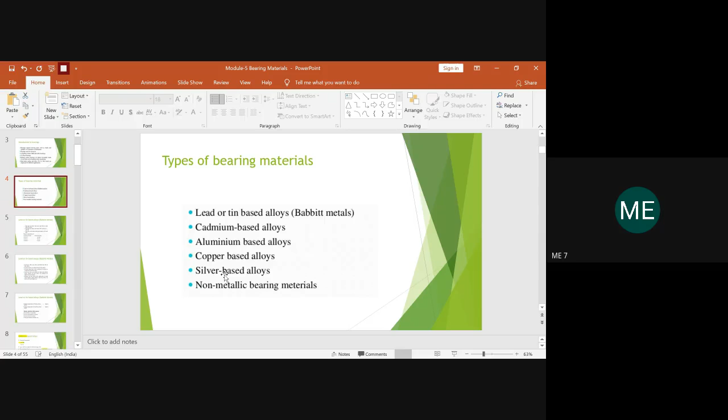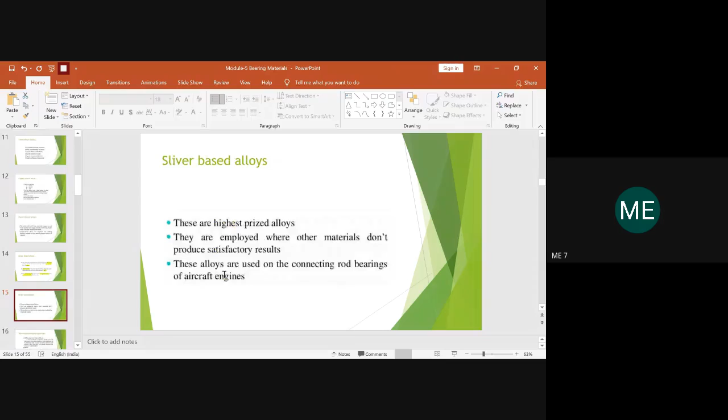If you remember in the previous class, we were discussing the different types of available bearing materials, like cadmium based alloys, aluminium based alloys, copper based, silver based, and also the non-metallic bearing materials which are feasible for making new bearing designs. We dealt with all these types of materials and their properties, how good each is for which type of lubricant, for which type of bearings. Coming to non-metallic, we spoke about Teflon and nylon, wherein Teflon had comparatively better results as a bearing material in comparison to nylon.

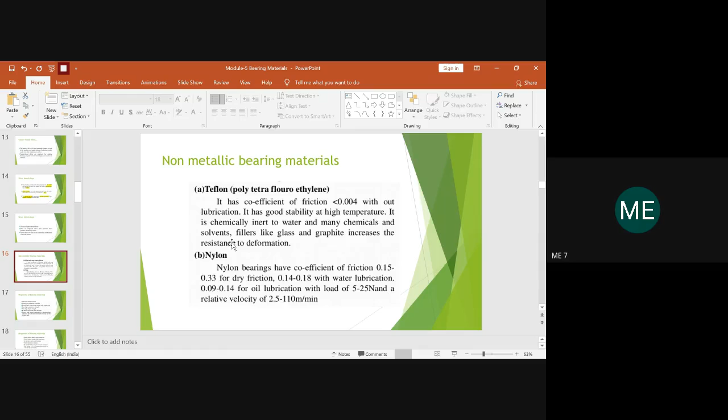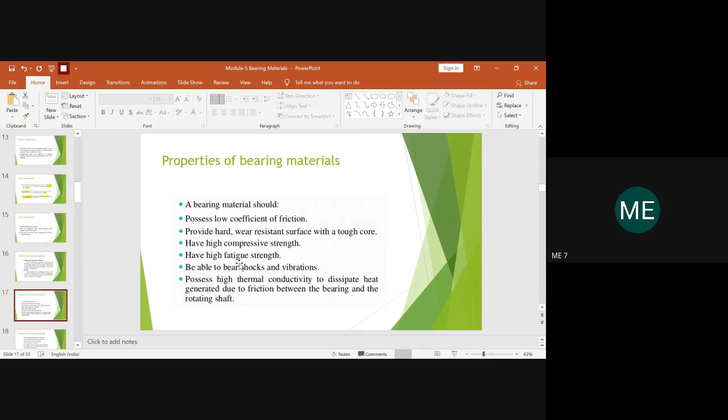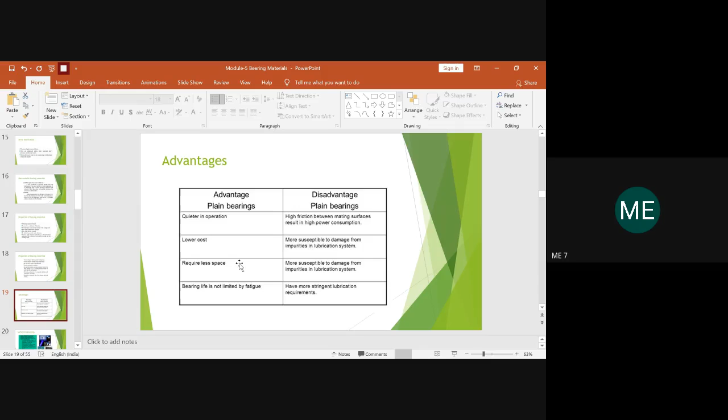We also dealt with the basic properties which have to be in any bearing material. These guidelines will help you in selecting the bearing material, regarding the general requirement and minimum physical properties that have to be there. We also spoke about how to figure out the advantages and disadvantages of any bearing material, focusing on plain bearings, which you can try to enhance further as part of your assignment after completion of this module.

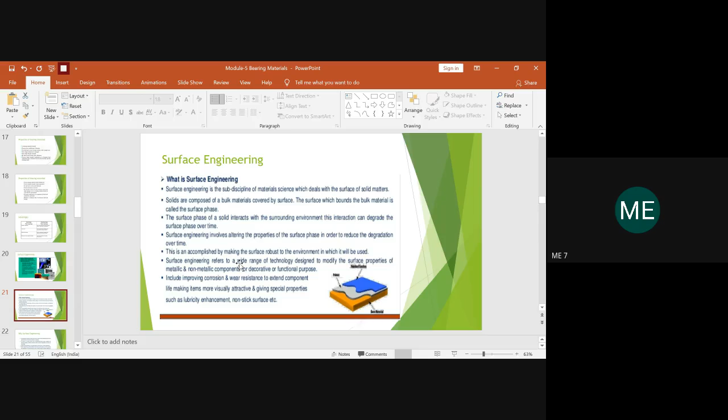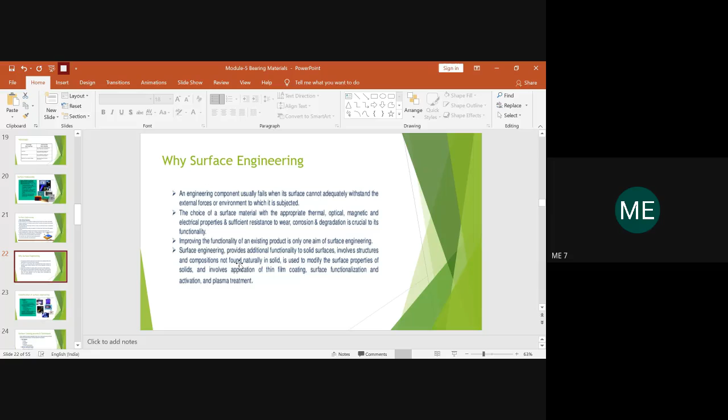Then we spoke about what surface engineering actually is, and its importance. With the help of surface engineering, how we can protect against wear and tear which comes into picture when you have any bearing device or other moving or rolling component coming into contact due to relative motion. We also studied why surface engineering is needed, what were the previous techniques, and what are the advanced versions of surface engineering schemes coming into picture now.

I had told you the basic classification of surface coating processes. These coating techniques came very recently, but in traditional practice also people safeguarded the surface of any device from the external surroundings so it could be protected from corrosion and other circumstances. They used to do it in a traditional way, and now as technology has advanced, we have advanced ways of protecting the surface of any device. So these things now you have to study in depth.

As I told you in the previous class, under traditional techniques we have very few, which are painting, electroplating, galvanizing, and also thermal and plasma spraying. These are the techniques which come under traditional categories. Apart from that, we have the advanced coating technologies which we have to go into in depth, one by one.

The first one is related to painting. As the name itself suggests, for any product, if you apply a layer of paint, it will help safeguard the body across the surface for a long period of time. It depends upon which type of painting you're using. This is a normal thing everyone knows, to protect the surface of the media, whether it's a wall or any other surface of a product that you have to safeguard from the external surrounding, depending on the quality of the paint you use.

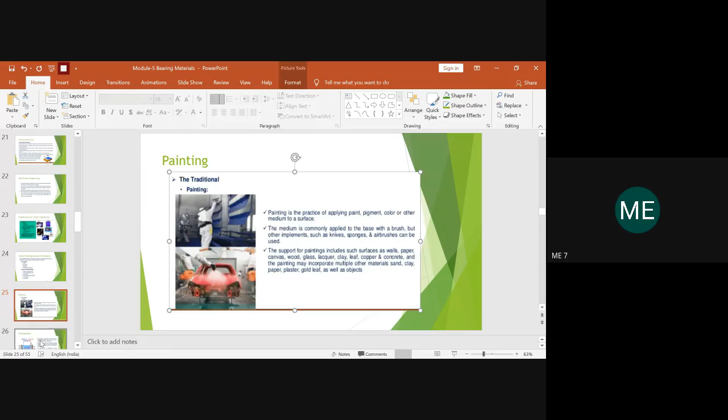So the second technique under the traditional one is electroplating. As the name itself suggests, electroplating is a process wherein it uses the electrical current. When you use an electrical current, it helps to dissolve some cations, mainly the metal cations. When these metal cations are dissolved, the dissolved metal cations result in the formation of a coating across the electrode. So this is electroplating.

You will have a container in which you will have the silver nitrate solution, with an anode and a cathode. When you subject the silver nitrate solution to an electrical current, the cations in the solution get dissolved and get plated on the electrode, so that it helps in protecting the electrode from the external environment. Here the anode you are using is pure silver.

This is just an example to explain how a surface could be coated by means of different techniques. The first one we studied was painting, and this is electroplating. So you should think when to use electroplating. It is mainly used to change the properties of the surface. Sometimes you need to protect the surface from the external surroundings. Sometimes the properties across the surface should be different than that of the bulk body.

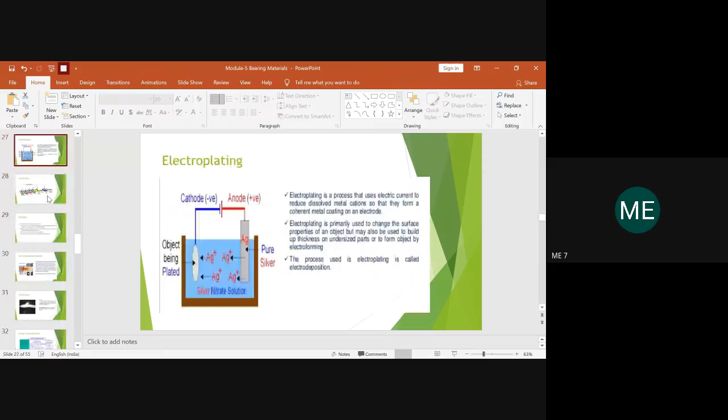So this is what usually happens in a galvanizing process. If you go into the galvanizing process, basically you will have two ways to make this layer of zinc coating.

The first one is it forms a coating of corrosion resistance, so that when you apply a zinc coating on the surface, it provides resistance to all the types of corrosion which can come into picture across the surface of the material. So this happens if the metal you are using is very delicate and gets corroded easily.

So again it depends upon the material you are using. If the metal or material you have selected is very good and won't have any problem related to corrosion, if it is a highly corrosion-resistant material, then there is no need of going for zinc coating, right? It already has high resistance towards corrosion.

Suppose the metal you have used is very delicate and can easily get corroded, then this galvanizing process will help in protecting the surface against corrosion. So this is why galvanizing has to come into picture. And secondly, it can also serve as a sacrificial anode.

So when you apply a zinc coat on steel or iron, it acts as a sacrificial layer. That sacrificial layer will help to safeguard the actual bulk of the body. Anything which happens will happen to the sacrificial layer, which acts as an anode, so that the device below that sacrificial layer will be safeguarded and won't get corroded or rusted easily.

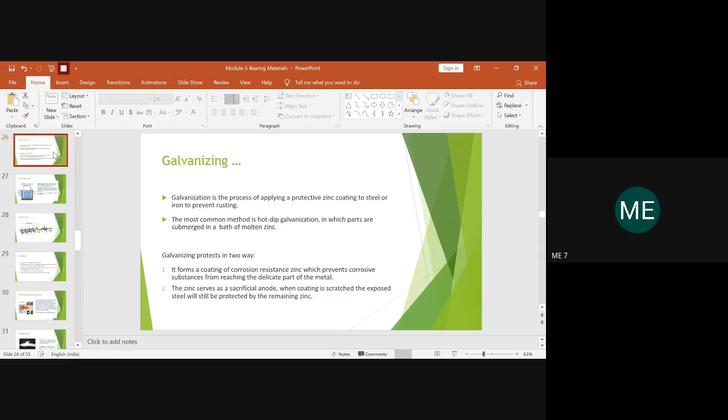So these are the two reasons why galvanizing has to come into picture, the two things you have to remember when you speak about the galvanizing process. First you will clean the surface, then you will rinse it. After rinsing, you have to do a process called pickling. Once the pickling is done, you will re-rinse it.

Once it is rinsed, you will dip it into a solution. Once you dip it into that solution, all the impurities will be removed, so it will be totally contamination free. Then you will allow it to dry. Once it is dried, you have a container which has a zinc solution in it. You will dip it in the zinc bath as per the required dwell time.

Once it has been dipped and soaked for the required time period, it will be allowed for solidification and cooling, so that the coating applied on the steel or iron, which gets easily rusted, will be solidified when it is subjected to cooling. After cooling, you will inspect whether the coating has been applied uniformly throughout the given rod of steel or iron.

If it is done, then the steel or iron rod which has been coated with zinc will have resistance towards rusting, and it will not get corroded easily. So this is the main reason why you have to go for galvanizing. Depending upon the requirement, you should think about which process you will opt for to protect your device from the external environment.

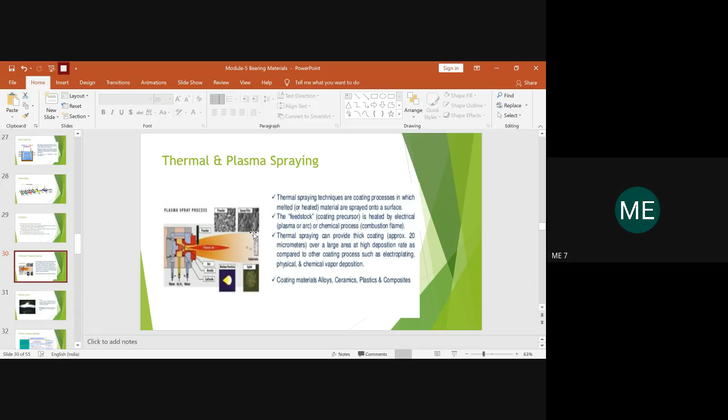When it gets heated to the molten temperature, the material gets accelerated. Why? Because of the chemical process. When the material gets accelerated, it moves from one end to the other. Finally you have a substrate here; it will come and deposit. It can happen with respect to temperature effect, or due to plasma spraying. In both cases, it helps to deposit the coating across the substrate. So this is how a plasma spray technique could be used.

This plasma spray technique is very useful when you're going to make a micro device, micro electromechanical systems. To make any MEMS device, plasma spray deposition will usually be very useful. But it has one disadvantage. What is it? The plasma spray process is very expensive, as the cost is comparatively higher, and the complexity of the process is also a little bit more. Hence, even though it is a very good technique, these two disadvantages make you think about whether to go with plasma spray or not. If suggestions and modifications could be made, then you can think about the plasma spray technique for large area applications. So this is about the plasma spray.

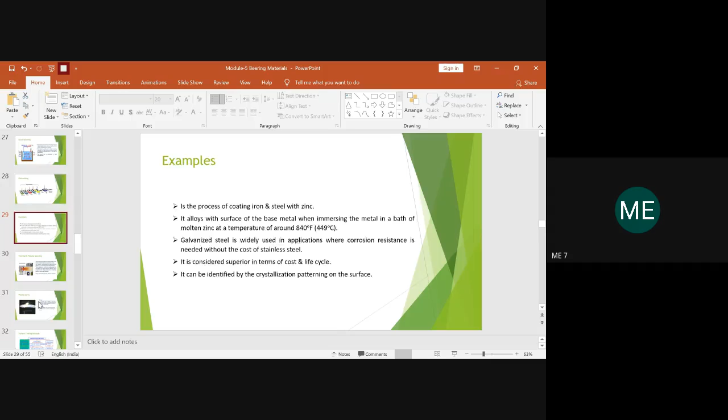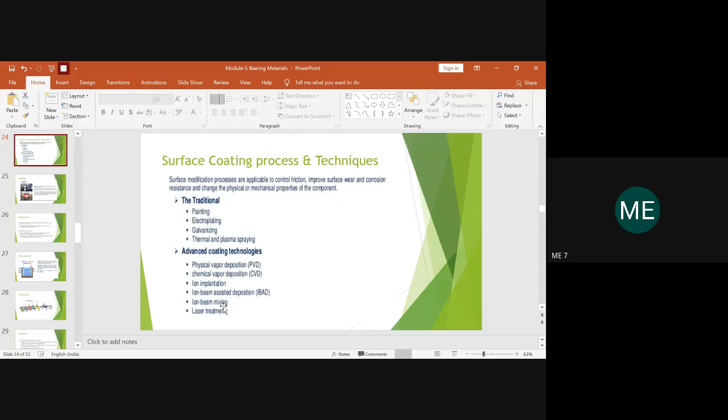So until now we discussed the traditional types of coating. What were the traditional types of coating to protect the surface from the external environment? One was painting, electroplating, galvanizing, and thermal and plasma spraying. So this is the traditional one. Then come the advanced coating technologies we can apply as per the requirement. These are physical vapor deposition, chemical vapor deposition, ion implantation, ion beam assisted deposition, ion beam mixing, and laser treatment. So we have to go through these one by one.

Before that, let me talk about the outline of different surface coating methods. These are the methods followed in any clean room when you want to make a micro or nano device. These are the basic requirements one has to follow for MEMS or nano device fabrication, wherein you use complex types of coatings. These coatings could be categorized into three sections. What are these three sections? Gaseous state, solution state, and semi-molten state.

And hence the name CVD, PVD, and IBAD. So in your syllabus, you have CVD and PVD, which we will be dealing with one by one. So when it comes to solution state type of coating, we have different methods to apply the coating across the surface. So this also we usually go for in thin film. So whenever you have made a thin film and you want to make a coating on it, you have to go by means of solution state.

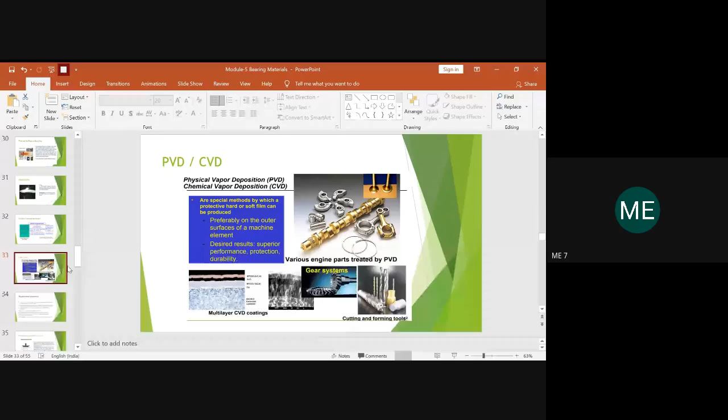So after this, any doubts related to surface coating classification? Are things clear enough? Hello, Mr. Kiran, are you there? Subramanya, kindly give a reply. Yes, ma'am. Are you understanding? Hello? Yes, ma'am. Any doubts, please let me know.

So under surface coating technique, you now have to study physical vapor deposition. So what happens in physical vapor deposition? Here a layer of coating will be deposited on the substrate with the help of vacuum deposition technique. So you should understand what this vacuum deposition method is. Right, the substrate will be kept in a closed vacuum chamber and you will be having the variants of vapor which are coming and falling on the substrate, and it results in the formation of a thin film, right? So this is the main trend which has been followed in physical vapor deposition.

So how you get this layer of vapor deposited on the surface so that you can characterize it by going into the morphology of the material and see whether the layer deposited is uniformly done across the surface, whether the thin film coating is done properly or not. So this you have to cross check.

First you will do the layer of deposition, then you will cross check by seeing the characterization of the layer which has been deposited. Okay, so in case of physical vapor deposition, you have two techniques through which the layer of vapor has been deposited. So what are those two processes? One is the sputtering and the other is evaporation.

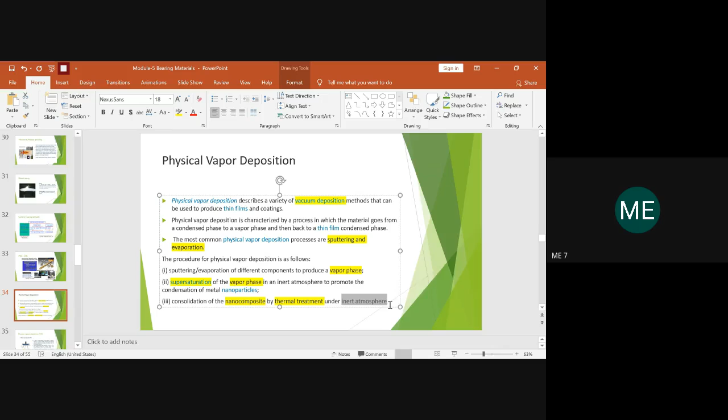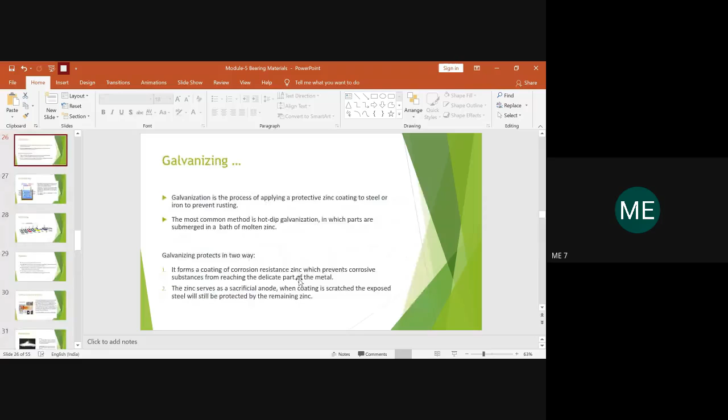In that, this PVD technique plays a really vital role. For regular, traditional coating, what we studied earlier like painting, plasma spray, electroplating, galvanizing will hold good. But now, as devices become thinner and thinner into micro and nano level, this type of PVD coating and CVD coating will play a very vital role.

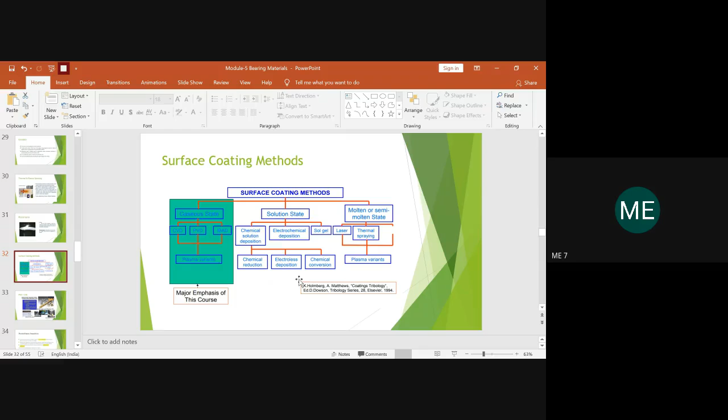When we speak about thin film, it is usually the target and the substrate, and hence in PVD coating it is usually mentioned as the target and the substrate. So you should not get confused about what is the target and what is the substrate material. This is about the PVD technique.

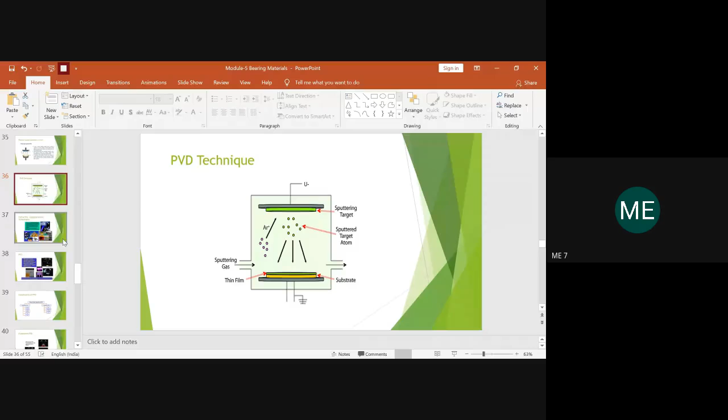One more thing, I told you that the layer could be deposited by means of vapor phase or by sputtering. If it is sputtering, how will it be sputtered? It could be sputtered either by ion beam sputtering or by magnetron sputtering. This helps to sputter the layer of coating from one point to another.

All this also happens again in a controlled, inert atmosphere, wherein it helps to move the atom from one point to another, resulting in the formation of the film. As you have bombardment of the atom from one location to the other, it is moving from one end to the other, resulting in the required coating.

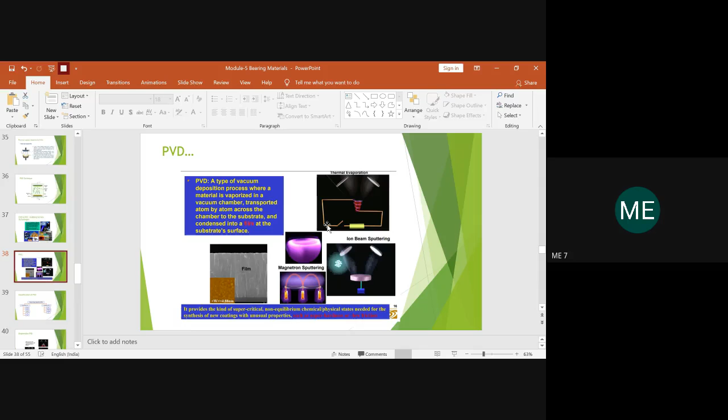This is in glimpse about the PVD techniques which are being used. Once you're thorough with the PVD techniques, you can see that we have different classifications under that. One is the evaporative PVD and the other one is the sputtering PVD.

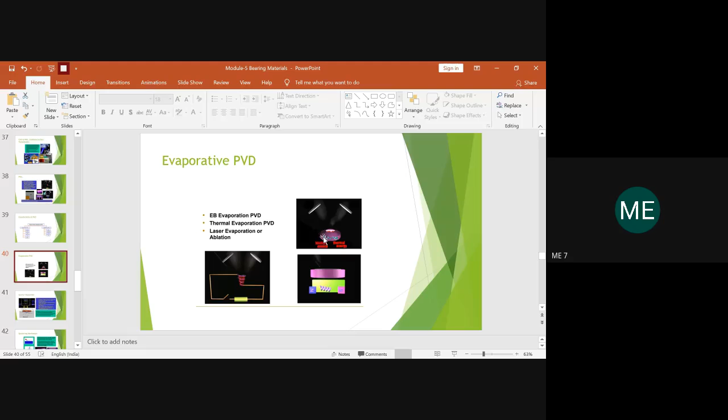Evaporative PVD has three variants, what I'm telling you. One is the EB evaporative PVD, which is a thermal evaporative technique, and this is a laser evaporation technique, what you have in general.

If you go in general to sputtering deposition, you have two types. One is the magnetron type of sputtering. In this sputtering unit, what happens is you will be supplying the voltage to the given container. You'll be having a voltage which you apply across the rarefied gas.

So it will be a vacuum chamber, having an inert atmosphere with the required gas. You subject voltage to the rarefied gas, and a breakdown occurs in the gas which is in the closed chamber.

When these two strike enough, some amount of energy is generated. This energy is transferred to the targeted atoms, and when it transfers to the targeted atoms, a few of it escape and directly come and sputter uniformly on the substrate. When it sputters, it results in the formation of a thin film. So this is about how sputtering comes into picture.

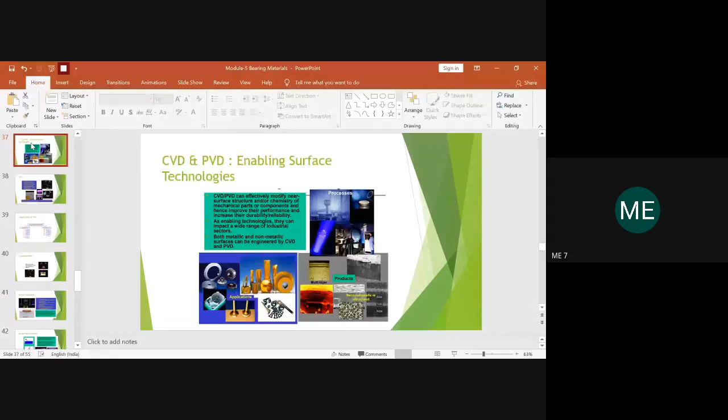In your syllabus you have just PVD - physical vapor deposition technique. If they ask you the PVD technique, you should know how this process comes into picture: one is due to sputtering, and the other is due to evaporation. Both techniques I have explained, and how the supersaturated vapor phase comes and how it gets deposited, you should explain.

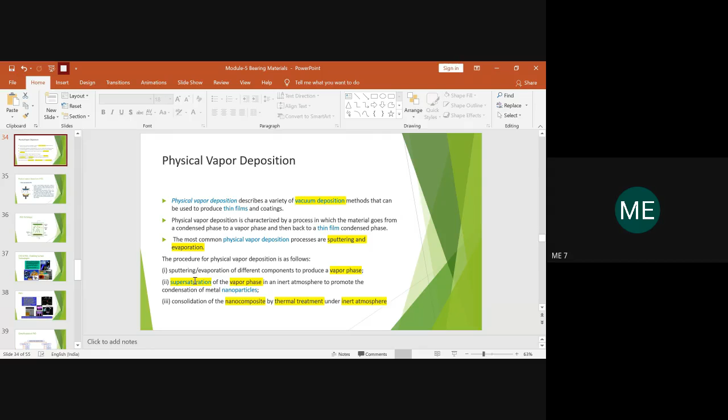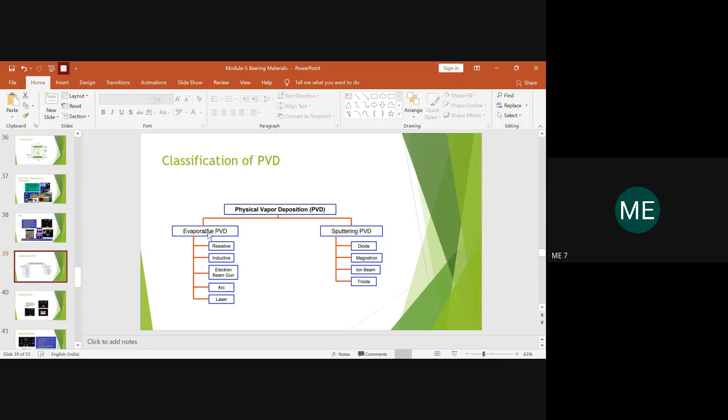For classification, you can just tell which variants you have, and only speak in general about the evaporation technique and the sputtering technique, as I told you about both. If you can draw a simple line diagram and explain it also, it will be really helpful.

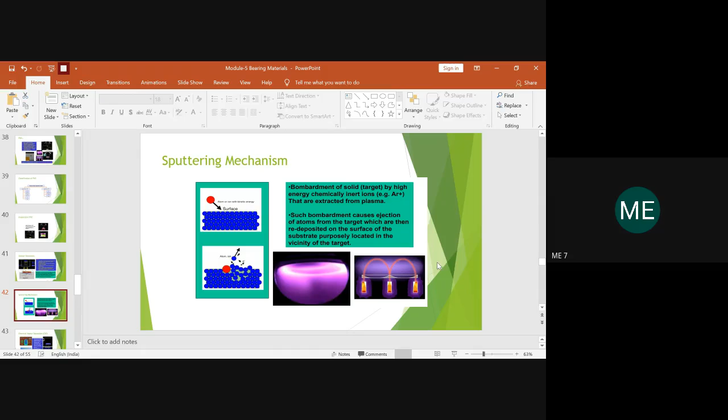So this is nothing but the sputtering mechanism, as I explained before. The same technique happens here - it depends upon whether gas is used to bombard, or a magnetic field is used to bombard the electrons, to have the coating across the surface.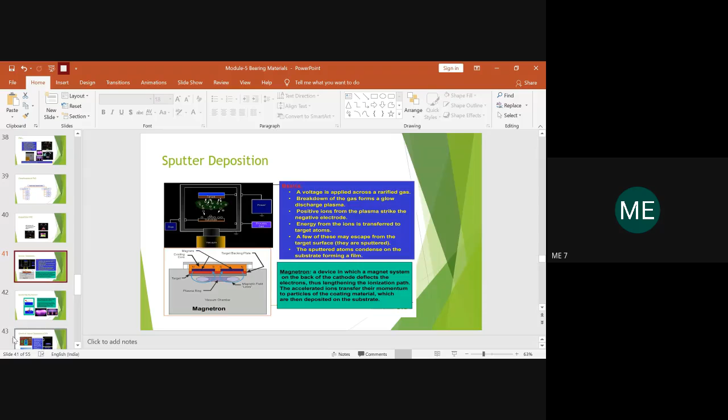So this is about the PVD technique. Any doubt related to physical vapor deposition technique? Is everything clear enough? Yes ma'am. Okay, so next is the chemical vapor deposition technique, which is called CVD.

What happens basically in chemical vapor deposition technique? It is a process wherein you have n number of gaseous species. It's like applying a chemical inert media in which you allow this gaseous species to pass in and get the required chemical reaction. Due to the chemical reaction, you subject that to thermal variance, and this results in activating the gaseous species thermally.

Due to this, plasmas will be generated, and these plasmas have positive ions also. These positive ion charges get accumulated across the surface, resulting in the formation of the required coating. This is how a coating comes into picture in case of CVD.

In case of PVD, you have the sputtering mechanism as well as the evaporation technique. Whereas in case of CVD, you have a gaseous species wherein you form the required chemical reaction by subjecting it to temperature effects, which helps in releasing the plasma. Once the plasmas are released, they have negligible mass with positive ions. These get deposited on the substrate, and it results in the formation of a film.

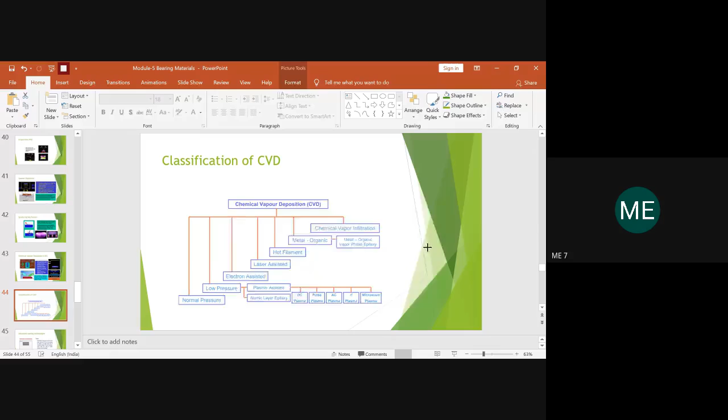In chemical vapor deposition technique, we have different classifications. This can be done at normal pressure, or it could be subjected to low pressure, because everywhere in chemical vapor deposition we use a gaseous species, which could be at normal pressure or low pressure. If using the gaseous species at low pressure, we have two variants: one is plasma assisted, and the atomic layer epitaxy. In both, you have different types of depositions: DC plasma, pulse plasma, AC plasma, RF plasma.

Usually in thin film deposition they go for RF plasma magnetron. This is the most commonly used type, and usually they perform at low pressure only. The last one is microwave plasma, which has also recently been started - this is the second version of deposition. The third will not be related to pressure, it will be related to the electrons. With respect to electron assisted deposition, this comes into picture when you enhance the temperature of the electron.

Next is laser assisted, where the laser assisted beam of coating will be applied. Next you might apply a layer of coating due to hot filament - you use a filament and enhance its temperature so that the plasma which comes out through the hot filament will be deposited on the substrate.

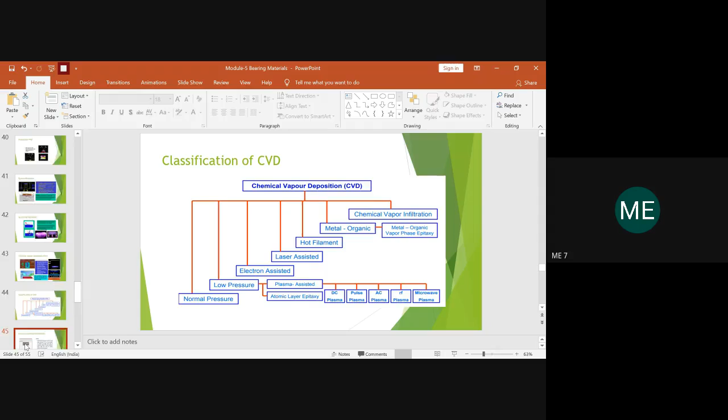Now about the materials being used as a target for PVD. The most commonly used PVD materials are titanium nitride, zirconium nitride, chromium nitride, and titanium aluminum nitride. Whenever you go with titanium based alloys, it is expensive - the target material purchasing itself will become expensive. So based on the requirement, you should see which target material you are using to apply a coating. This type of coating is very much needed in industrial applications.

If it is for industrial applications, the coating you use should be very accurate, precise, and reliable for a longer period of time. Hence it is very much essential to select the target material properly. These are usually expensive, but it is still very much mandatory to safeguard the device you have developed across the surface from the external surrounding. In that case, going with this target material is very much essential.

So these are the advanced coating technologies available under the PVD section. You should know this well enough - it is not like you only know the process of PVD and CVD, but which types of materials are used, what tools are used for fabrication - all things you should be very clear about.

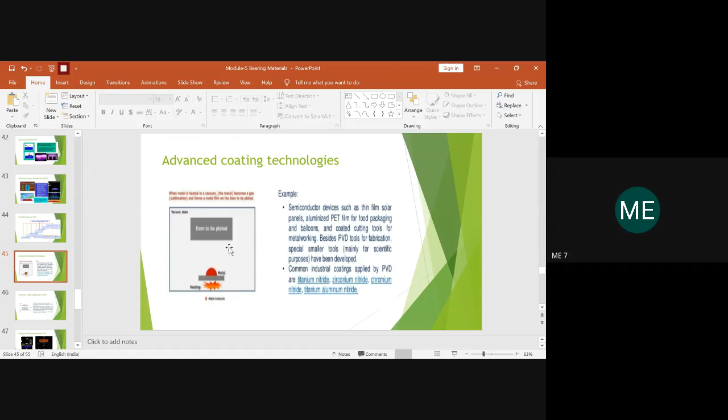techniques. So the costly materials are, as I told, titanium based: titanium nitride, zirconium nitride, chromium nitride and titanium aluminum nitride. So this is about the coating technologies and the materials which are available for different applications.

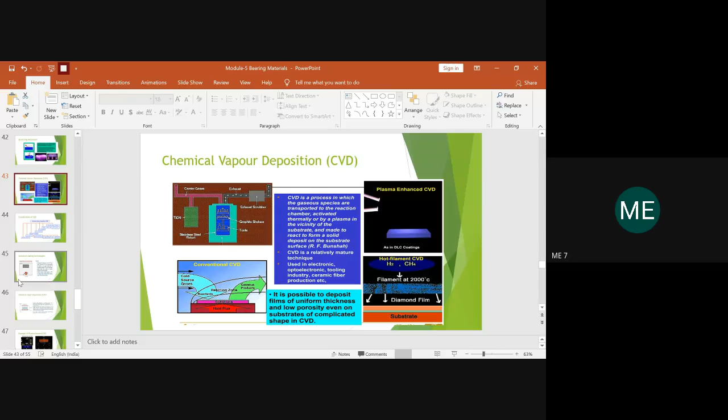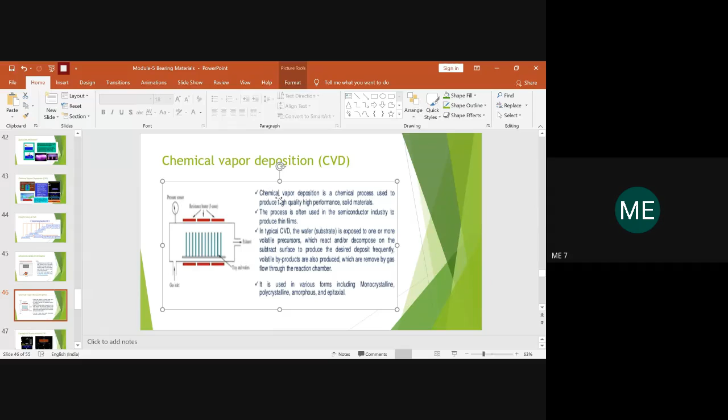And we were telling about the chemical vapor deposition technique, why it is being used. Here we mainly use the gaseous species. So in an inert chamber, by varying the thermal parameters, plasmas will be generated and that will be deposited. So how exactly, you should be knowing clearly, right? What you have to understand is CVD, which is nothing but chemical vapor deposition, as the name itself suggests, is a chemical process.

You use this deposition where you need high performance of any device you have developed. These devices we develop will be made in bulk by using solid materials. So this should be safeguarded for a longer period of time, meaning you need a good coating layer on it. So in that case, you can go with chemical vapor deposition. So the next question which comes to mind is, okay, you know about chemical vapor deposition, but in which type of industry is it basically used?

So the answer is this type of chemical vapor deposition is usually done in industries like semiconductor industries, because in all the semiconductor industries they basically develop thin films. So protecting the thin films from the external environment is a bigger task. So you should have a good coating layer. This good coating layer which can last for a longer period of time could be achieved by the CVD process. So 99.9% of applications are in our semiconductor industries.

Okay, so here you should be very keen in selecting the substrate. The substrate is also called a wafer. The wafer or the substrate will be exposed to one or more volatile precursors, because for the substrate you have developed, you have to see how it reacts to the external environment. You can check how it affects it when you use some volatile materials which can show sudden response to the external environment. So you will select the volatile materials. So those will be the precursors.

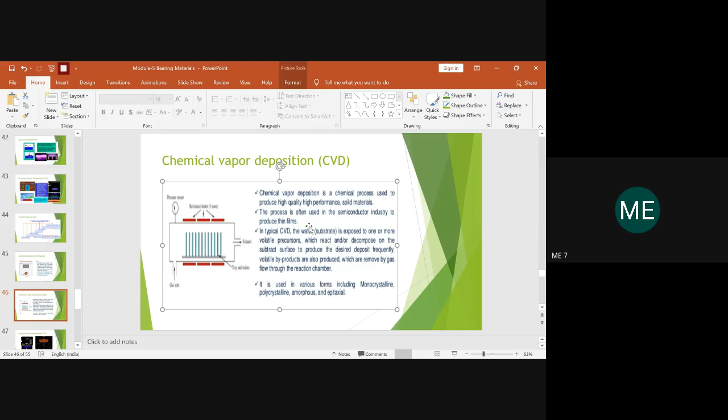It could be an amorphous material also. So based on the classification of the materials what you use as volatile precursors, the variants could be analyzed. This is basically purely used in thin film industries only for the semiconductor applications.

So this is the example of plasma assisted CVD again here. Okay, so how the deposition comes into picture with respect to plasma enhanced CVD, what we have. So this is the plasma which is coming on, which will be having the positive ions in it. So it will be deposited on the substrate.

Time up. Okay, okay. I'm sorry, I didn't see the time.

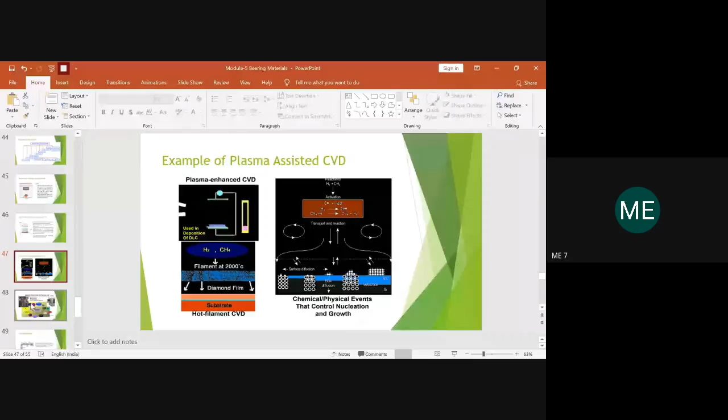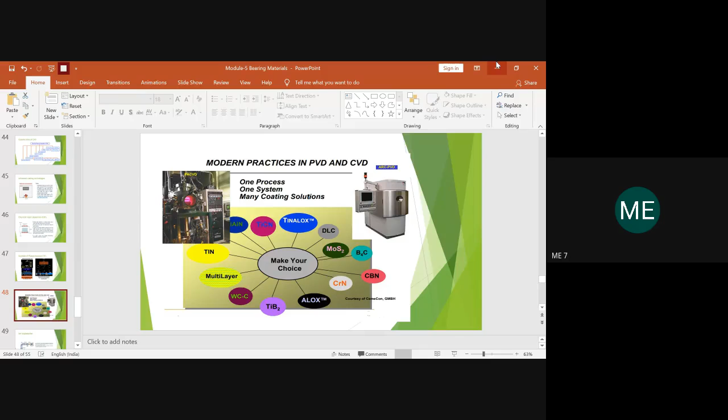Okay, so this is about the example of plasma assisted CVD. So there are other practices which are being done in day-to-day new trends. There are n number of new practices coming in combination of PVD and CVD also. So it is like many coating solutions you can get under a single umbrella, one process. So these are different layers of coating what you can do. With different layers of coating, you can get a multi-layered coating also, so that it will really have a permanent safeguard for your surface from the external environment. So these things you should be very much clear about.

So from the next class, we will focus on the other type of techniques, ion implantation, ion sputtering, all those steps are left out. So we will deal with that. Any doubts associated with this, kindly let me know.